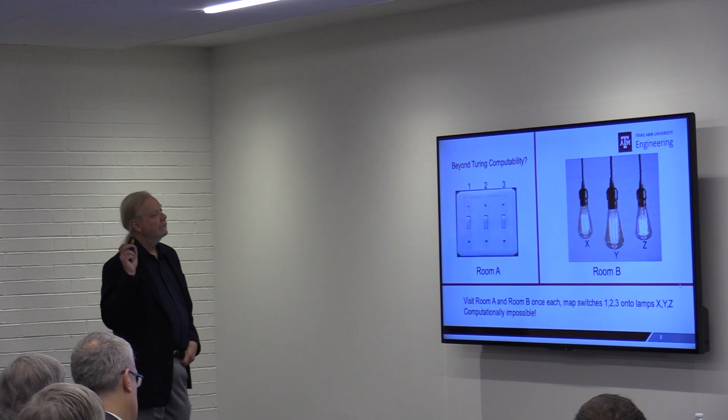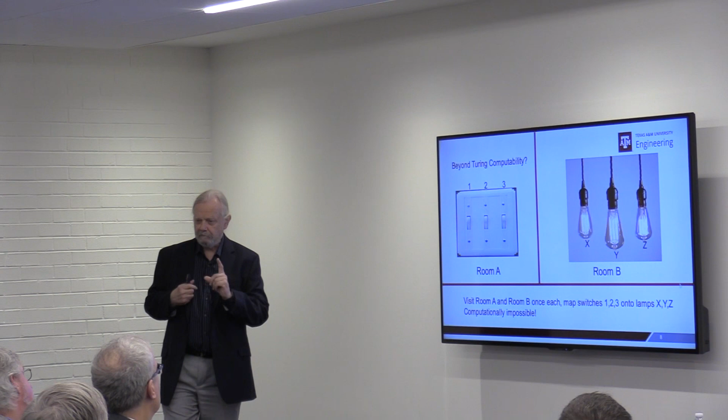Now, the issue is, again, I said that I'm not exactly sure that brains exactly behave like a Bayesian inference machine. And so here's an example that I like to show. Human beings are actually fairly clever. We can operate outside of the rules. Like, I never color inside the lines, right?

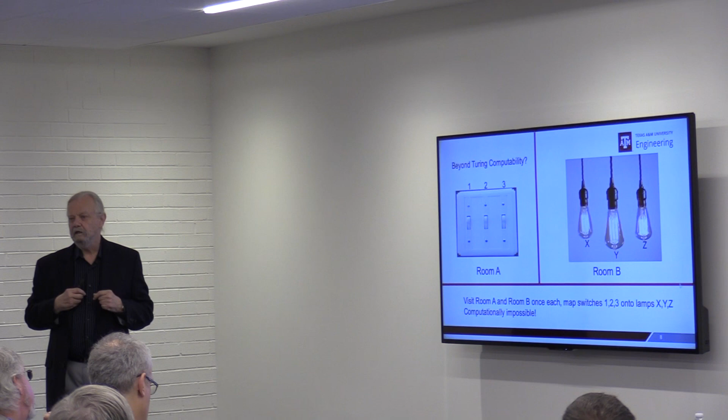And so let's think about 2 rooms. Say there was an electrician who wired up lighting in this room, and then by mistake wired up the switches in a different room. All right, so we've got 3 switches and 3 lights. And what you're asked is, okay, visit room A and B only once each, and map switches 1, 2, and 3 onto lights X, Y, and Z. A mathematician will tell you this is impossible. It's not computable.

However, if you turn on two switches, wait a little while, then turn one of them off, go into the other room, and touch the two off light bulbs, one of them is warm. Okay? And so you can solve this problem. A human being can solve this problem because we cheat. We don't follow mathematical rules.

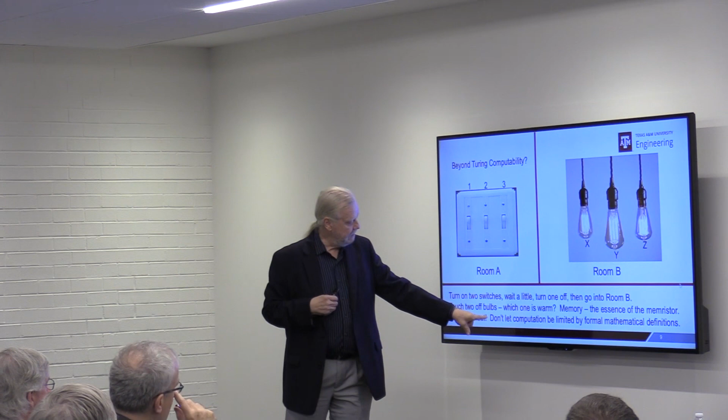So the issue is don't let computation be limited by formal mathematical definitions. So any way that I can cheat this problem, I do. So I'm going to talk about neuromorphic computing, this thing about being brain-inspired. It turns out that probably every person in the world working in this field has their own definition of neuromorphic computing. So there's no standard definition of it.

So I tend to use the word brain-inspired. But my goal is not to reproduce the brain. I don't care about that. That's not what I'm trying to do. Other people are, but not me. What I want to do is build much better computers that humans can use as tools, hopefully to amplify their capabilities. So let's just take a look at what the state of the art is.

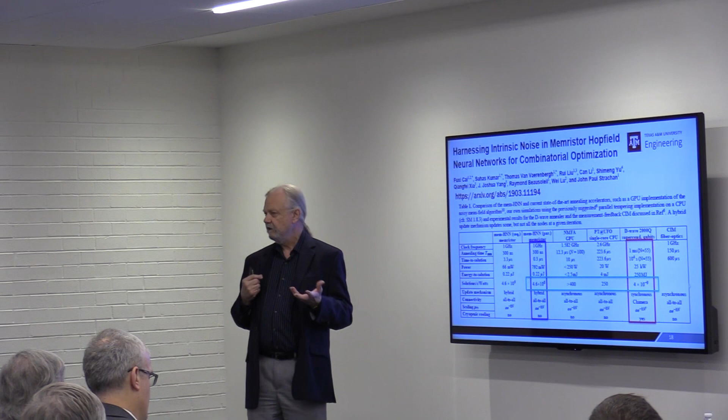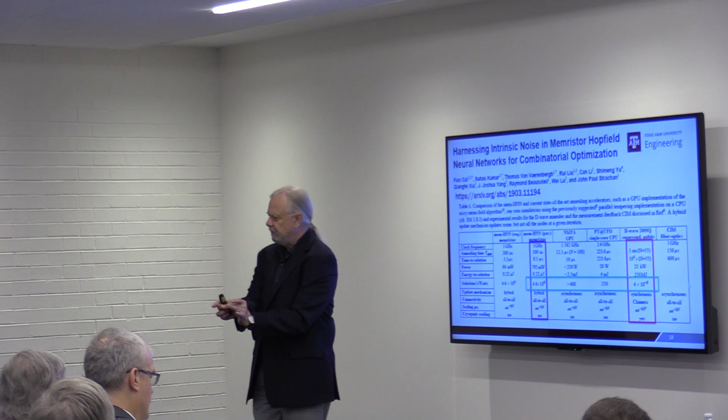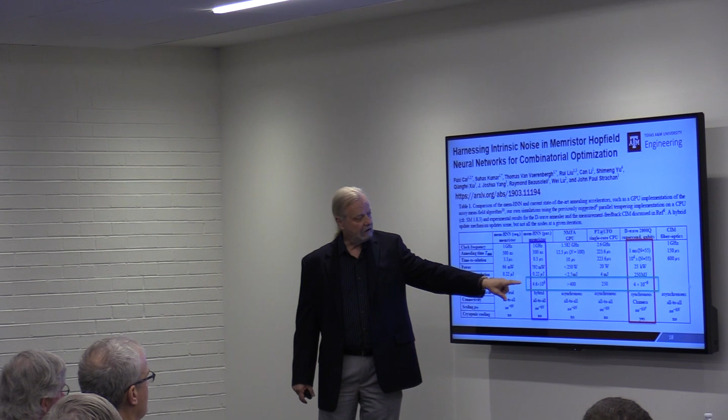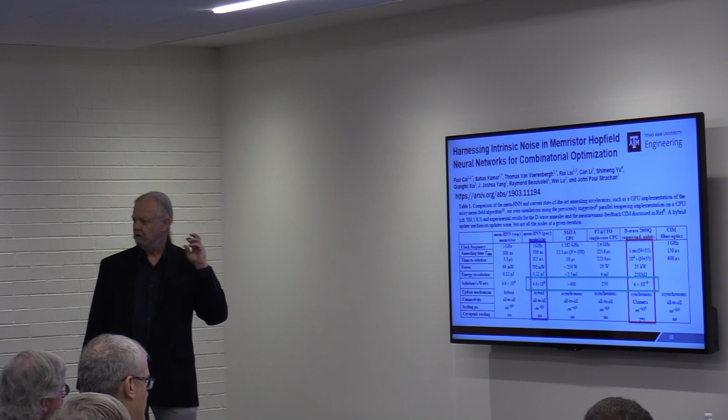So without getting into too much detail, what I'm going to just show you here is that this simple room temperature chip, really, that's really very crude, a lot of it's still hand wired up, was able to perform, in terms of number of solutions per second per watt, 4 times 10 to the 6th solutions of this problem. D-Wave was 4 times 10 to minus 9. So this Hopfield network outperformed D-Wave by 15 orders of magnitude. 15 orders of magnitude. Room temperature, crude, something that can be dramatically improved upon.

Okay? This probably cost a couple of bucks. About 100 million. Okay? So. A lot of recent news on that, too. Yes. We won't talk about quantum supremacy. Maybe during the Q&A later we'll talk about it. Well, what I'll say is, I can flip a coin 53 times in 200 seconds, and so if Google has quantum supremacy, I've got Google supremacy.

All right, good. So now here I was asked to go out on a limb. So this is the first time I've said this number. I'm going out on a limb. I haven't proven it yet, but I believe that there are potentially 20 orders of magnitude improvement possible in these systems when I take all of the various things that I see and put them together and try to look at building a system. So this is not proven. They told me be bold, so I'm being bold. 20 orders of magnitude improvement that we could achieve over the next 10 years. So instead of Moore's law giving us a factor of 2 every year or so, we could get 1 to 2 orders of magnitude improvement every year.

But it doesn't come for free. There's a lot of research and development that's going to be required. We got to sort of get up and start running. That's why I went to Texas A&M. I have a better chance of doing it there, I think, than in a company. I don't have to be proving to my bosses every 3 months that we're putting products in the market that are helping out. So I'm trying to look at this 10-year timeline.

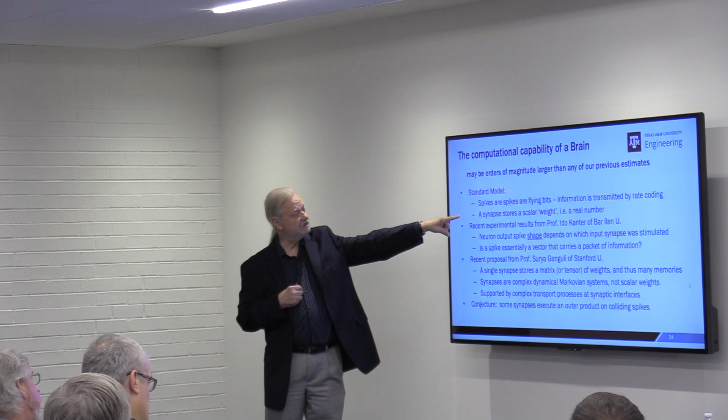And the other issue is that individual synapses actually store more than one number. They really store a surface. Well, yeah, what they're doing is they're storing a tensor.

All right. And so what you can think of is that when two spikes, if you want to call them that, collide in a neuron, what's actually happening is not just some simple multiplication factor that's going on. You're actually getting an outer product of essentially two multi-dimensional systems. Right? So actually, brains I think are a lot smarter than we ever thought they were.

Or if this actually isn't right, I don't care. I think it's such a cool idea that this is what I want to build anyway. Right? There's no reason why we have to be constrained by exactly what the brain does. So that's an issue. Nonlinear device physics.

So I've been working with a lot of groups. I've got a bunch of former postdocs out there now. I've got something like 30 postdocs that I've infected the world with. So I'm working with them.

And so here's some issues where we've been actually using silver in silicon dioxide to emulate the calcium diffusive dynamics at synapses. And by looking at something like this, you can actually see that there's a shape to the spike, or in this case, there's a potential to have essentially a tensorial synapse in the system.

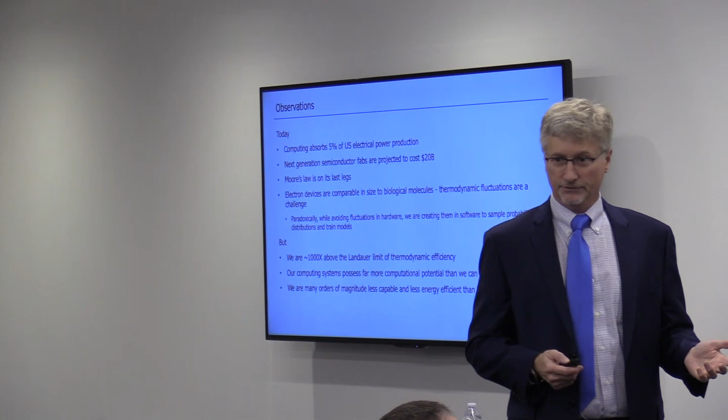Okay, motivation. A few observations. So computing absorbs 5% of US electrical power production today. Next generation semiconductor fabs are projected to cost $20 billion. Moore's law is on its last legs. Electron devices are comparable to the size of biological molecules, and for that reason thermodynamic fluctuations are a challenge. Paradoxically, however, while we avoid fluctuations in hardware, we are creating them in software to sample probability distributions in machine learning systems.

But we are still about 1,000x above what people generally refer to as the Landauer limit of thermodynamic efficiency. Our computing systems possess far more computational potential than we will ever be able to program. And we are many orders of magnitude less capable and less efficient than brains, as Stan just mentioned. So my conclusion here is that we are in the late stages of a mature technology paradigm, but we're still a long way from fundamental limits.

So a few more thoughts. I think that the primary problem in computing today is that the computers cannot organize themselves, that we have to basically program everything that they do in gruesome detail. And so we end up with these very large systems with trillions of degrees of freedom, but mostly they're doing the same few things over and over again. So the machines are ill-suited to evolving complex real-world problems.

And I think the reason for this is that while the machines can transform information and energy into different sorts of things that we care about, they are literally frozen. They are too cold, and for that reason, they can't evolve on their own. Lastly, I'll comment, machine learning systems universally employ thermodynamic concepts, but they are still ad hoc solutions without an overarching physical paradigm to guide them.

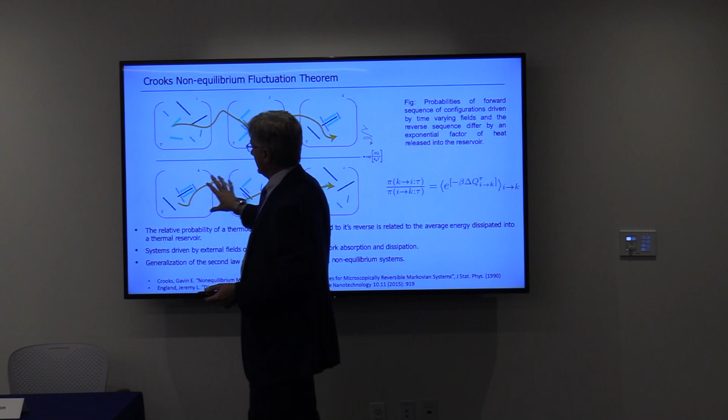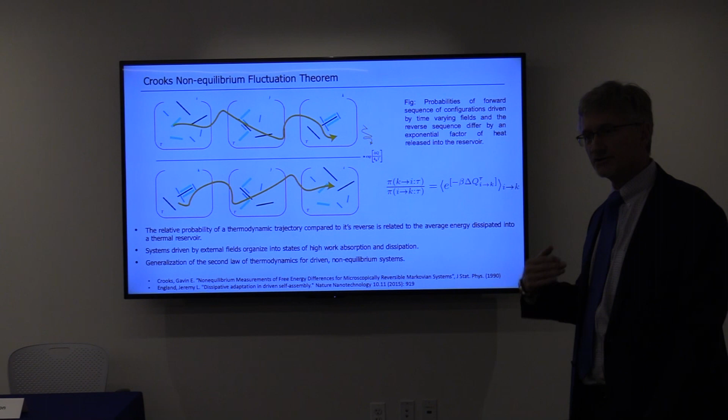And as an example, Crooks has a more detailed theorem, a non-equilibrium fluctuation theorem. And what it says is that if you took a reaction, this is an open thermodynamic system, it's driven by external potentials, if you average over a reaction in one direction and divided it by the same reaction going in the other direction, you average all of those things, you would end up with some measure of the amount of heat that's dumped into the environment. And again, it's an equality. Okay, so this is an advance in our thinking about thermodynamics.

All right, so intuitively, what am I talking about? What did I do with the water? Did I have some water? There we go.

So here's my intuitive interpretation of non-equilibrium fluctuation theorems. What it says is that when you're dissipating a lot of energy, you're basically a novice. You don't know what you're doing. Okay? There's a lot of energy loss. There's a lot of things being tried. There's a lot of adaptation and learning in the process of doing so.

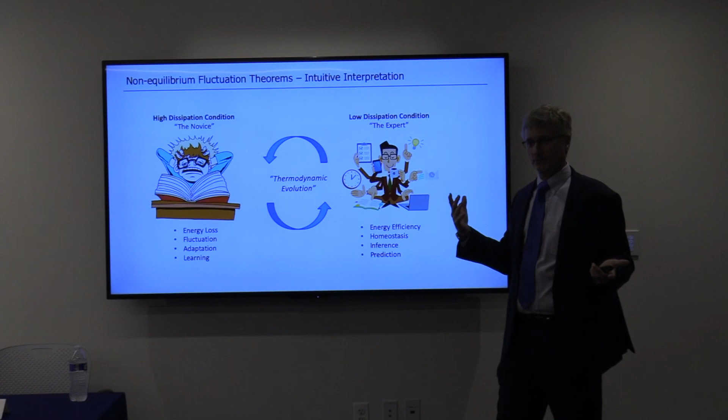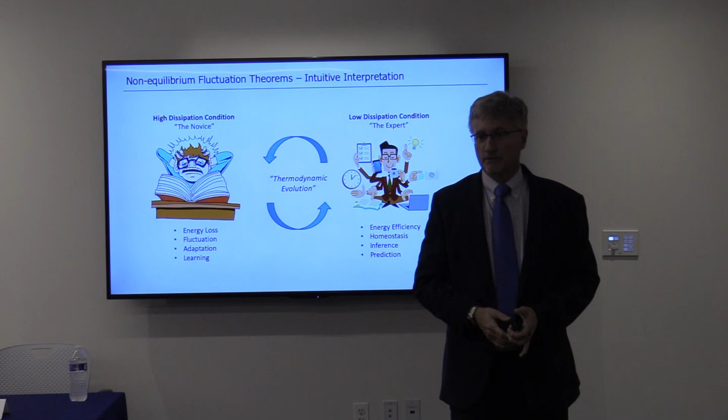When you do know what you're doing, you're in the low dissipation condition, and you're the expert. You're efficient. It looks like it's effortless, right? And in the thermodynamic evolution, you're able to predict what's going to happen. And there's an evolution that goes on in getting from here to here, all right? This is basically what those fluctuation theorems are saying in an intuitive way.

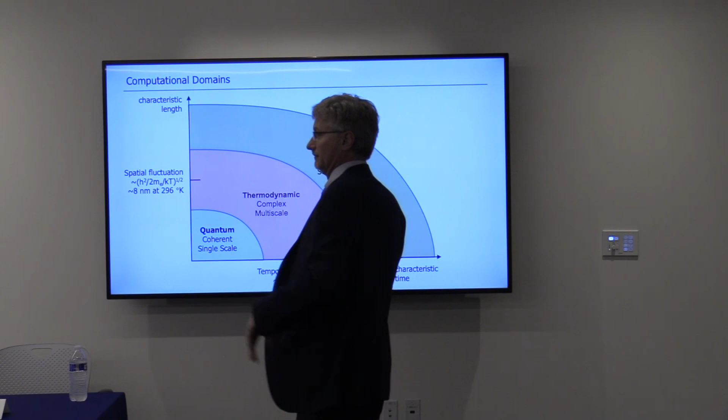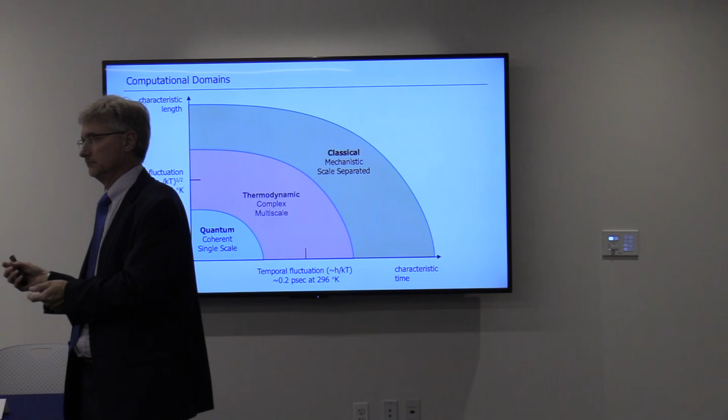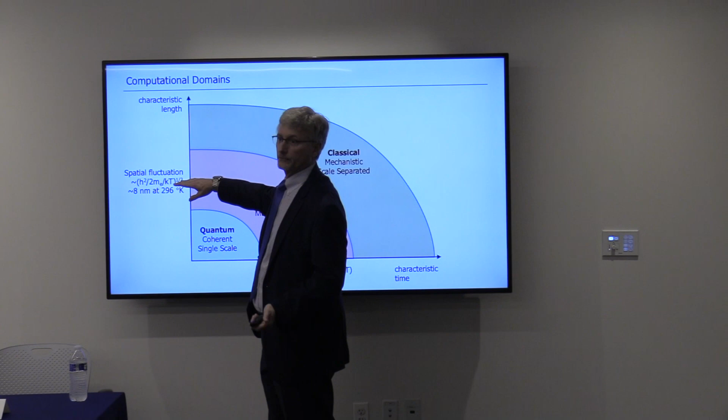So I wanted to say a little bit about where I think thermodynamic computing fits with respect to quantum computing and classical computing. Okay? Classical computing is what we do now. And I'm going to do it in terms of thermodynamic fluctuation scales. Okay, so I've got temporal fluctuations on this axis, spatial fluctuations on this axis. I put a marker here to say, if I just set room temperature equal to the free electron energy, this is the scale that I'm talking about. Okay? It's a physics argument.

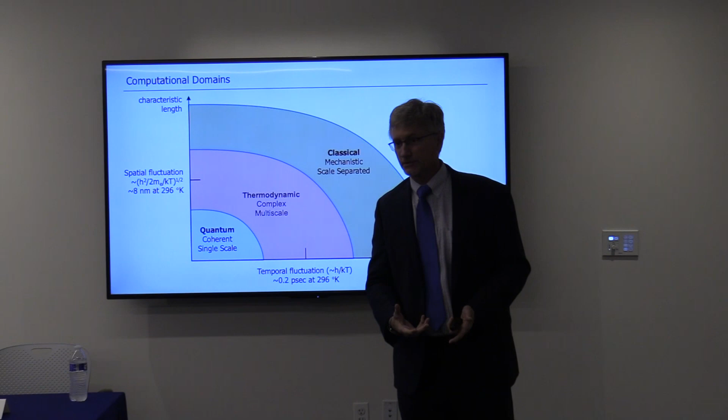Now what happens in classical systems is that the fluctuations are small compared to the things that we think about. Okay? So if you're a transistor, there's a lot of fluctuations going on inside, but in general, we don't care about them because they average out in some way. Okay? So in the classical domain, things are scale separated. I don't have to think about what's going on at the microscopic scale or at the fluctuation scale because things are big. And this also makes them mechanistic. We can think about them as machines in this space.

Now in the quantum domain, basically you don't want any fluctuations. You want the fluctuations to be large compared to the scale of the system that you care about. And when this happens, you get these coherent sort of single scale quantum effects, all this magic stuff that the press likes to talk about. But it basically means that fluctuations don't matter. They don't matter here because we average them out, and they don't matter here because there aren't any.

Okay? Now in both cases, in both the classical domain and the quantum domain, the problem is that we want to operate right on this boundary right now. The quantum guys are desperately trying to get bigger systems, higher temperatures, and still maintain a single scale. And in the classical domain, we keep wanting to make things smaller, so we keep getting into trouble.

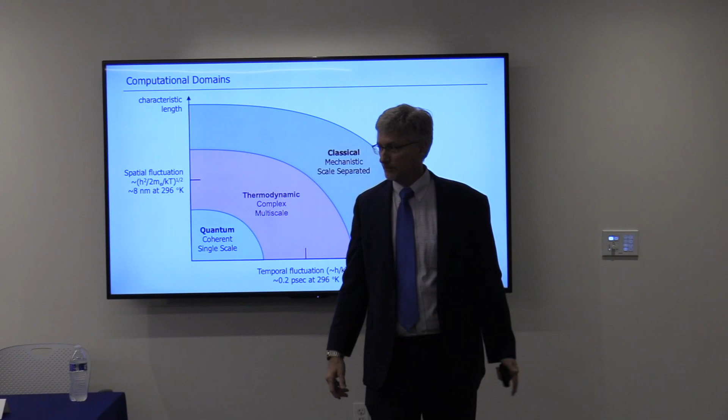The thermodynamic domain is right in the middle. It's the domain where you can't separate scales and you can't ignore fluctuations. This is the domain where your brain works, where every living system operates, where cells work. This is where the world really is. So when we pretend that we're going to do things like this, we unfortunately ignore the fact that we're actually trying to do it over here. And so it isn't going to work, in my opinion.

So as a further comment here, if you look at things that we're familiar with today, in the quantum domain, the fluctuations are large if you're an atom or a small molecule. So they look like a unit, a quantum unit. Transistors, gates, things that we usually think about in computing domains are large compared to the fluctuation scales, so they look like devices. We can abstract them. We don't have to worry about all this stuff going on. We can describe them as state machines and a bunch of other simplifications. But here, the domain of large molecules and nanotechnology is fundamentally thermodynamic, and this is where living systems are.

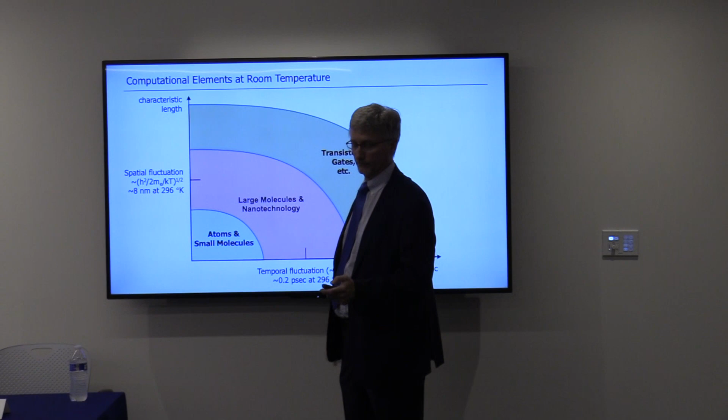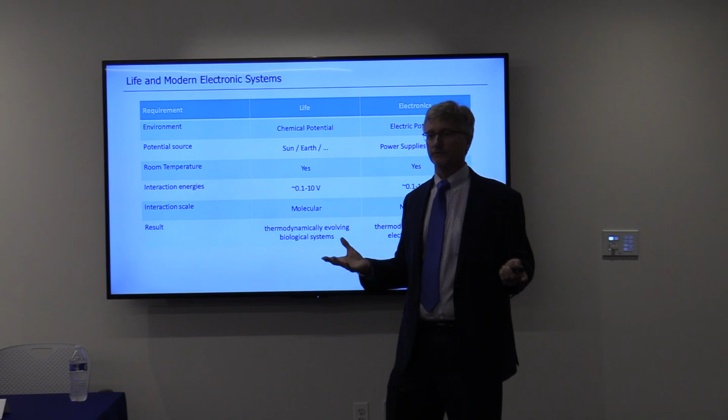Okay, so a comment about living systems versus modern electronic systems. In living systems, we've got mostly chemical potentials that are driving things. In electronics, we have mostly electrical potentials that are driving things. Interesting thing is that the energy scales and the size scales are roughly the same now. Because of the advances in electronics, voltage is going down, size is going down. The energy and size scales are roughly the same for electronic systems and living systems. And the reason for that is that they both derive from the electronic structure of the materials of which they're composed.

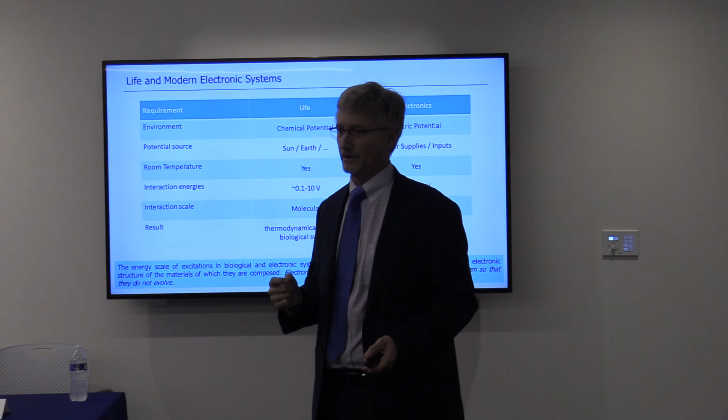And I contend that our electronic systems today do not evolve because we are killing ourselves to make sure that they don't. The advantage of making sure that they don't evolve is that they do exactly what we tell them to do, over and over and over again, which can be of great value in many domains. But I think it becomes very limiting if you want a system that's able to take on the real world by itself.

Semi-permeable membrane. What? Semi-permeable membranes. Maybe. Well, hang on to that thought.

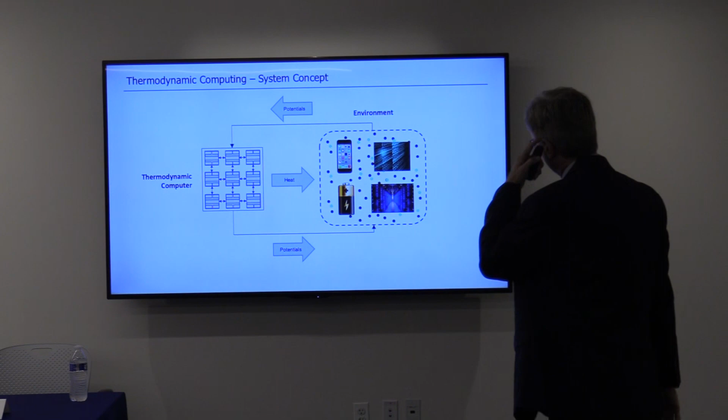So here's an idea. Here's the same idea again. I've got this thermodynamic computer here. It's connected to another computer that I'm not showing. It's connected to an environment in which there's information and there's electrical potentials and so forth. Potentials come here, this thing creates potentials here, and there's a bunch of heat flowing in and out of a reservoir. Okay?

Okay, so how does it work? How should such a thing work? Why would it evolve a structure? So imagine this as a kind of thought exercise. I've got some number of cores, they're connected into a network somehow. Maybe I can reconfigure the network, but what happens is that as energy flows through this system, it creates fluctuations where that energy is dissipated, okay?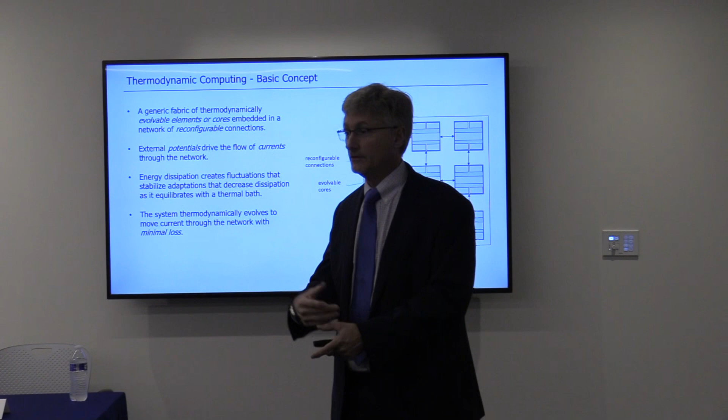So if it's dissipating a lot of energy in one spot, it's going to get a lot of fluctuations. Now, if those fluctuations spontaneously fall into a state in which that dissipation decreases, then the fluctuations decrease and the system stabilizes. Does that make sense? So you create heat, you create fluctuations, you get a fluctuation that effectively transports energy, then that stabilizes the state on that fluctuation. And this is the way a system would evolve thermodynamically.

So here's a cartoon I made even when I was at DARPA. So imagine here's a network of cores again. I'm defining a problem, which is the environment of energy that it's connected to in some way. As a programmer, this is the computer that's on top. I can go in and set certain pieces of this thing up to be certain states or functions that I want them to be. I'm just going to say, do this. I'm the programmer.

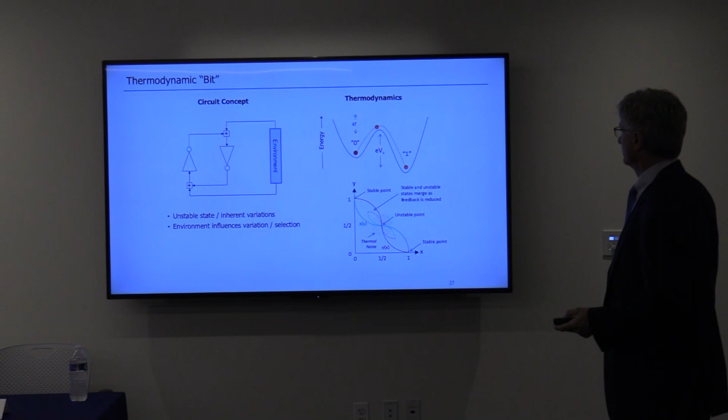And then what happens is I turn it on, and it starts fluctuating different states for these different little cores, and as it becomes good at moving energy through itself, it stabilizes. Okay? And it solves the problem presented to it by the environment because it stabilizes in a low energy configuration. I'm going to skip this. We're out of time. Okay.

Now, so in January of this year, there was a workshop in Hawaii. Stan and I were on the organizing committee, and so we wrote a report about what thermodynamic computing could be. It should come out next week. It was sponsored by the Computing Community Consortium. And you can see a bunch of ideas. We don't know how to do all this obviously yet. It outlines a bunch of research questions, research directions, the whole thing. Okay?

Okay, now thermodynamic neural network. How much time have I got, Mike? I would say about 5 minutes if you want to leave time for questions. So try to think about wrapping up if you want to have some discussion. Let me be very quick then. Can you make this play? There should be a... Not going, is it? All right, let's skip it. No luck?

So if you'd been able to see this, what you would have seen was small metallic beads in a petri dish with oil in it, and electrodes at high potentials, one in the center of the petri dish and one on the ring around the edge. And when you turn the potential on, you get all these cool fluctuations of the balls moving around in the oil, and they form these beautiful tree-like structures until they connect the potential and basically are very efficient at moving the charge from one electrode to the other electrode.

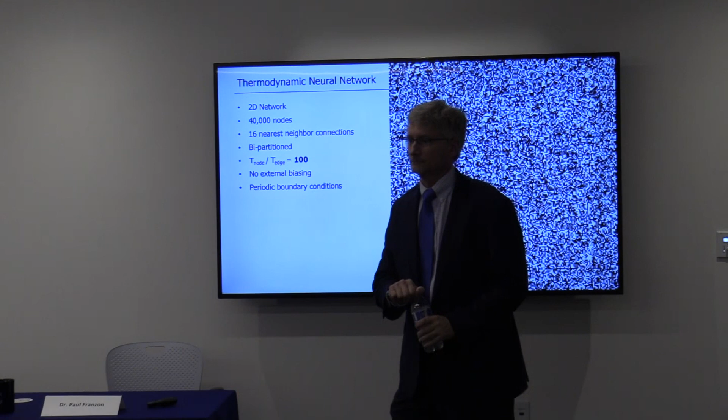All right. So then I'll take my prerogative. This is great. I love having the prerogative.

So I understand the concept of allowing fluctuations, right? You want to be in a regime where you have fluctuations. So in order to be efficient, the goal then is to just use those fluctuations to find the optimum state, so then it will evolve into a state with little to no fluctuation. Do I have that right, or did I understand that right?

If left to evolve, I think the answer is it depends. If you have a very strong potential driving the system, the goal is that the fluctuations will just drive the system into the lowest energy state. It's kind of annealing. Okay? Yeah, it reminds me a lot of the Hopfield landscape, right? The energy landscape, right? And you're adding pulses of energy to pop it out.

But there's nothing ad hoc in this model about where the fluctuations come from. You have a Hamiltonian, you have a Boltzmann distribution, and that's it. There's no noise sources, there's no annealing schedules, there's none of this junk. Do you have a finite temperature? You have a finite temperature, which you can change, right? Like in this example, I have different temperatures for the nodes and the edge states, but there's a few knobs you can turn.

Now, on the other hand, I think a natural system, say our brains, is always in a state of constant fluctuation, right? There's some method of preserving what it is we know while constantly fluctuating and exploring new spaces. This is how we think, I think, anyway. And this model can also do that. You can train it, and then you can let it fluctuate, and it can largely remember what it has been previously trained to do by potentials it's seen before.

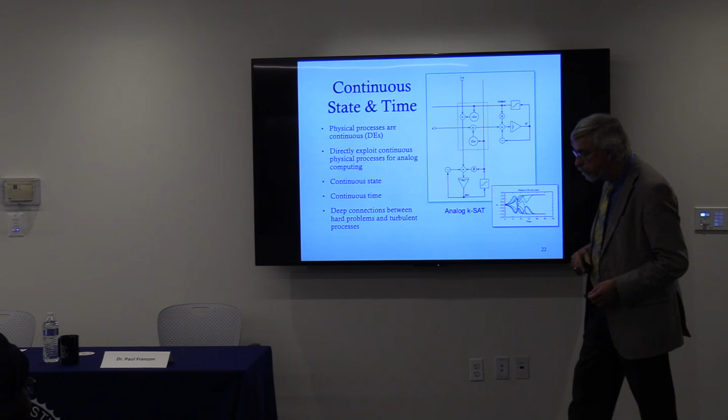Fairly obvious idea that it's settling into an energy minimum. And you can see here there's a simple simulation of it as the variables settle into their 0 or 1 states with some essentially changes of the decisions.

So continuous time systems, but spatially continuous systems as well. We don't have to think about computational systems being made out of a bunch of discrete components connected together. There are many phenomena in nature described by partial differential equations. These are massively parallel. We can make use of them.

And what I find particularly interesting is that the same basic mathematics that we use for describing some physical systems also describes much of the processing that takes place in cortical maps in the brain. Okay? So again, we can often lift the mathematics and then apply it in another system with a different physical realization.

So this is perhaps the prime slogan of embodied computation and related ideas such as physical computation: respect the medium. That has not been so much what we have done with digital electronics, where, as some people describe it, we've tortured the medium, taking these basically continuous electrical processes and making them look like they are Boolean processes. So the other slogan is exploit the physics, don't circumvent it. So as much as possible, try and use the physical processes directly to implement computational processes.

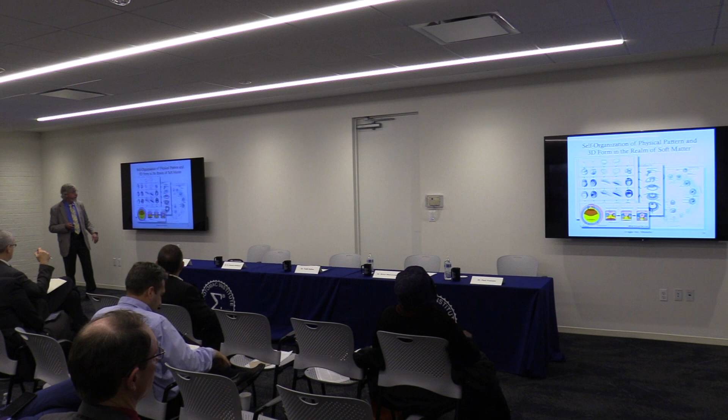I'll skip this. There's really about 15 fundamental processes that take place in embryological development. If we can do these, in principle, we could make something as complex as an animal body.

So this is trying to get away from crossbars. How do we wire up neurons without crossbars or something equivalent to a crossbar? Because that's n squared space, okay? So what I'm looking at here is how can we wire up something, again, with the complexity of a human or animal brain. So one example, because we want to coordinate very large numbers of agents, is to use flocking algorithms.

I hope this video will play. How do I play it? There we go. So this is 5,000 simulated micro-robots, essentially wiring up connections between randomly chosen origins and destinations using the modified flocking algorithm. They're using an algorithm so they don't collide with other fibers that are already in there.

So we want algorithms that will scale up to very large numbers, hundreds of thousands or millions. Okay? So we don't want something that's just going to work with 100 agents. We want very dense nerve fibers connecting different regions of our artificial brain. Here you'll see this is a collision.

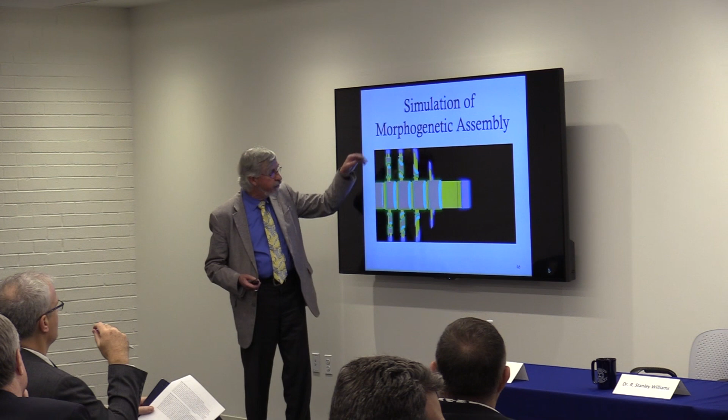And I'll just briefly show you this. So what we're doing here, this is the tail bud that's periodically generating a signal that you'll see propagates down here. And as it passes through these different regions, it causes them to differentiate into spinal segments. And these are morphogens that are diffusing from the edges of the spinal segments, and they're causing discs to form here that are using the same algorithm, in fact, the same simulated morphogens to grow the leg segments. But they can have different numbers of segments and different sizes of the segments.

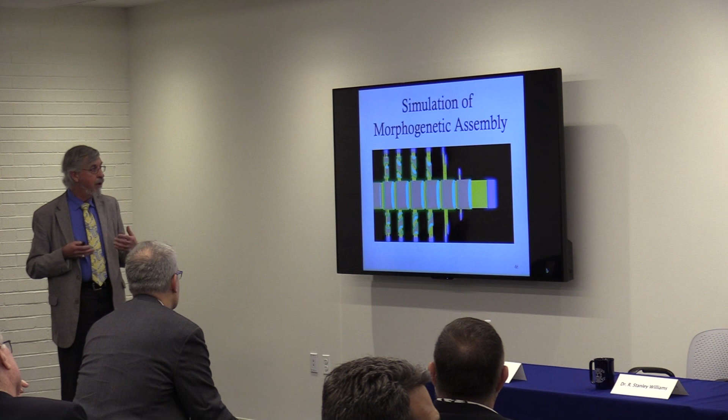So this is all partial differential equations describing the interaction of these robot swarms and the morphogens that they're secreting and responding to. Okay, and I think I'll just put up my conclusion slide then.

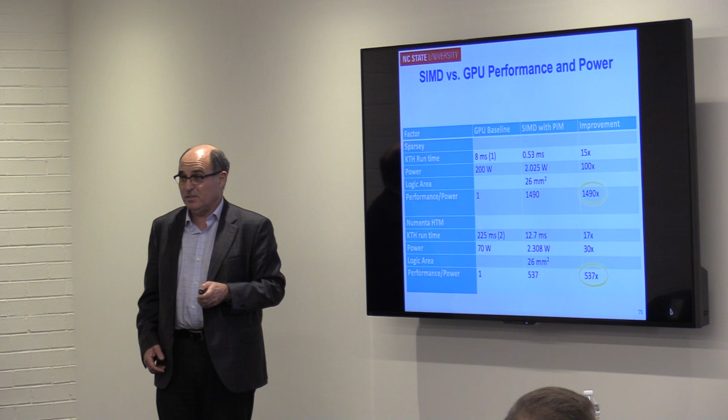Identifying the application-specific functions and what their code is, that's much harder. There are a lot of people working on this. I believe applying machine learning to this problem has potential to actually create a solution path that doesn't exist today. Getting near optimal circuit design from the high-level code is also something that we need. Again, this is very hard. We're not at the point where we can do this.

But I believe that factors like being able to run NP hard problems on a quantum computer and get exact solutions or near exact solutions, or similar approaches to that, have potential to solve this sort of problem. So for example, one thing that we're actually doing is looking at solving what are considered to be NP hard and NP complete problems on a noisy intermediate scale quantum computer. This is IBM, so we're working with IBM on this.

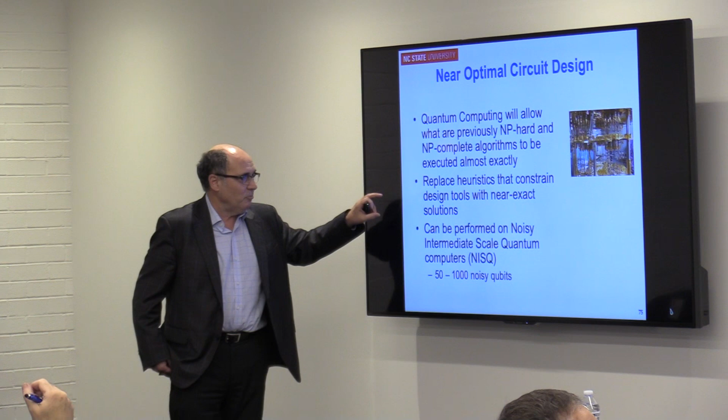So we're looking at replacing heuristics with near exact solutions for EDA problems, such as those that enable optimal design. One problem we've been looking at is a balanced min-cut, which is used in a lot of circuit and layout problems. Solving it exactly is NP hard or NP complete. But solving it approximately, but not with heuristics, is possible on a hybrid of a conventional computer and a noisy intermediate scale quantum computer. And right now we're doing the programming to show this. So this is work in progress, but I think it's feasible and it's an indicator of the potential here.

I'll skip some of the details here. Low cost, low volume fab. This is partly a technical challenge and partly an organizational challenge. The equipment, the business model, everything is organized in the fab industry towards very high volumes. There are alternatives, cluster tools rather than high throughput tools, business models that reward low and mid-volume manufacturing.

And frankly, time's in my favor here. 20 years from now, 3 nanometer will be an old technology that's been completely paid for. So that will dramatically reduce the cost in and of itself. But there's organizational and technical issues here too.

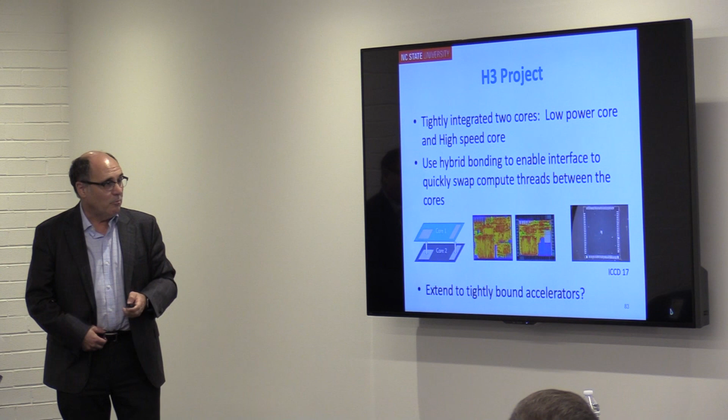We had a project funded by Intel looking at applying these technologies to computing. What we did was intimately integrate 2 processors together using fine pitch hybrid bonding so that the compute thread could move between them on a cycle by cycle basis to optimize the throughput.

Now, I'm not particularly suggesting continuing that project for the next 20 or 50 years, but replacing one of these with an accelerator function that has all the resources of the CPU intimately tied to it is what I'm suggesting as a way to deploy accelerators with general purpose computing in a way that leverages the infrastructure of the general purpose computer.

This is the SEM of the project, 2 chips face to face with the hybrid bonds shown in the middle. And this worked, the chips worked, which is always good in academia, and by themselves had a significant improvement. Though I'm not arguing for continuing this project. What I'm arguing is this is an example of using this technology to create 2 chips or a chip stack that work together very intimately.

Skip those. So this is what I'm arguing. Instead of a second processor, stack an accelerator that has a special purpose unit designed using the techniques I was talking about before, that has direct and fast access to all the CPU resources, and most importantly, to the memory bandwidth that is integrated with the CPU. And these can be digital or analog accelerators, depending on what you're able to design and what is the best solution for a particular problem.

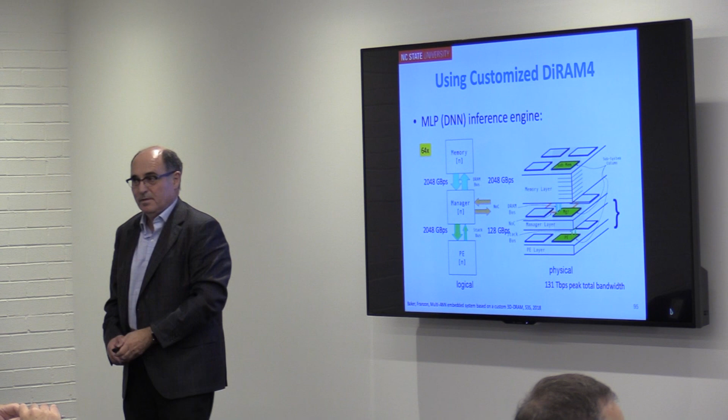What we basically were building was an array of 64 high bandwidth memories. Each memory could feed up to 2 terabytes per second in each direction. And that's each bank. There's 64 of these across the chip stack. And so altogether, we actually had 131 terabits per second of peak memory bandwidth. We've also done a design exercise looking at doing this for a more conventional memory structure than Tezzaron's.

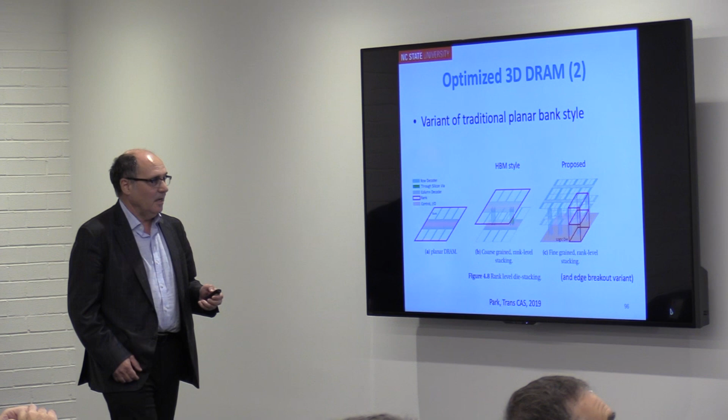And even in that, we found that we can have a sustained throughput of a terabit per second. And sustained is very different than peak. It's much harder to get high sustained throughputs through specialized design of the 3D memories, even using more conventional memory options than Tezzaron's. And again, I'm just leaving this in. I'm not going to go through all the details.

But the point is here that a specialized 3D memory can dramatically outperform the commercial state-of-the-art memories with applications that need it, and can very dramatically outperform SRAM, which actually isn't a high bandwidth technology. It's really a low latency technology. So that brings me back to my thesis, that one vector that allows us to continue on a Moore's law type exponential curve is increased use of specialization, and the key is providing the technology set that enables that.

Integrating general purpose and special purpose compute functions by leveraging those specialized processes using evolutions of today's 3D technologies, and creating specialized, intimate, fast, low power, and very high bandwidth memories are all keys to enable computing to keep on an exponential growth curve in both cost, power, and throughput.